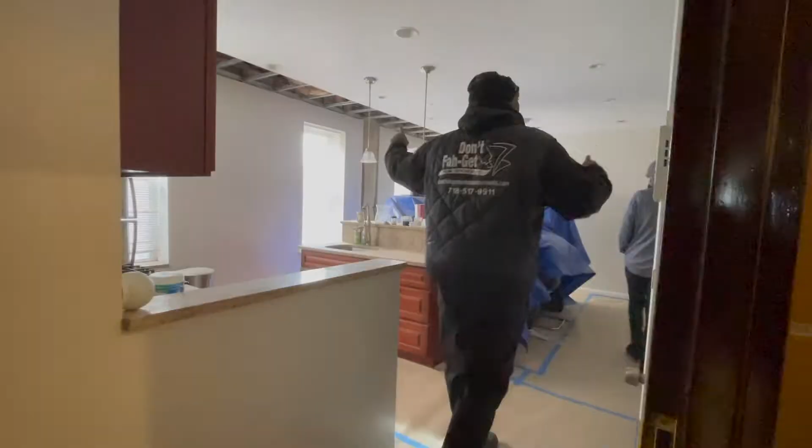Hello, my name is Darren Phillip. I'm the creator and developer of Don't Fah-Get Construction, 162 Towers, and Phillip Solution. Prior to becoming a developer, I was a professional athlete. During my days of playing professional sports, all I thought about was my next career, and that was to become a developer.

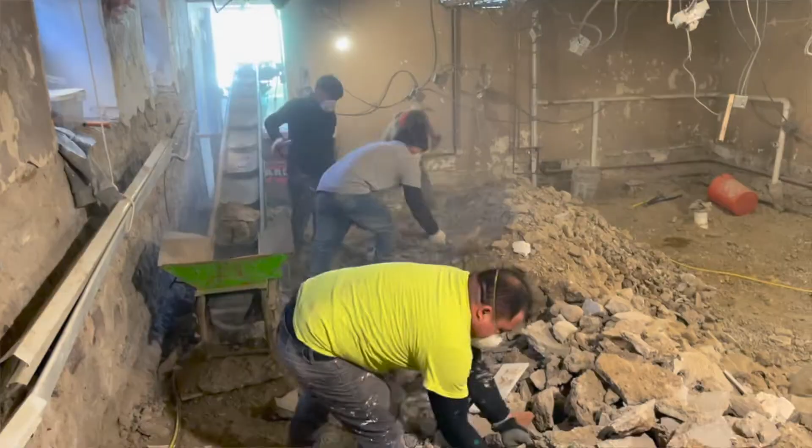So we're here at 162 East 52nd Street, also known as 162 Towers. We're doing something here that most people don't do. We're going to be changing an apartment complex from a 4-unit into an 8-unit. And you want to know how? Hard work, dedication, determination, and the know-how. This is something that everyone can do. A lot of individuals like yourself have multi-units that they'd like to get bigger. In our New York City area, you can't go east to west, you can't go left to right. But what we can do is go north and south and go up.

And this is the process we're doing here. We're doing something that hasn't been done on this block. Not a lot of people do it in this neighborhood, multiplying the amount of people that can be put in this building. 162 Towers is going to be the first of its kind. There's not a lot of projects, as I explained, that have this type of work and the way it's going to be done. This is a process that's taken years.

This is what turned me from a common local contractor into a developer, because I want to develop space. My game plan is to develop the area, and the only way to develop the area is bringing fresh and new blood.

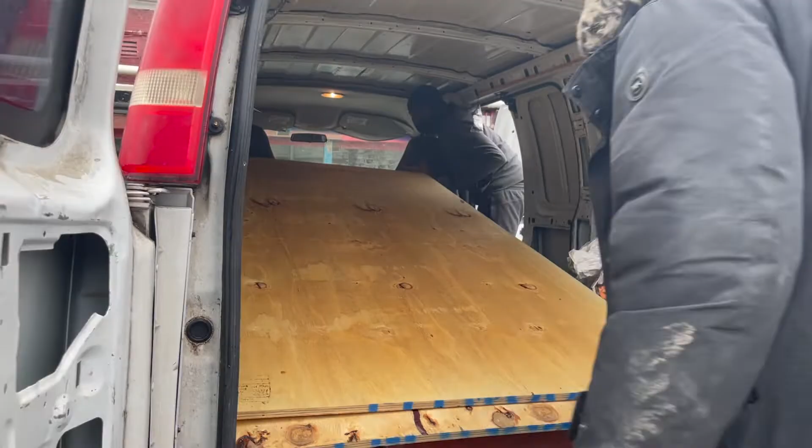Here we are coming back from the backyard where we put most of the materials, because another thing you have to do when you're doing construction is have storage places. A lot of times you want to order material, and especially in this climate, materials are very hard to get. So what we have to do is always have somewhere to store it, somewhere to put it, so we know exactly when we need something, we have it.

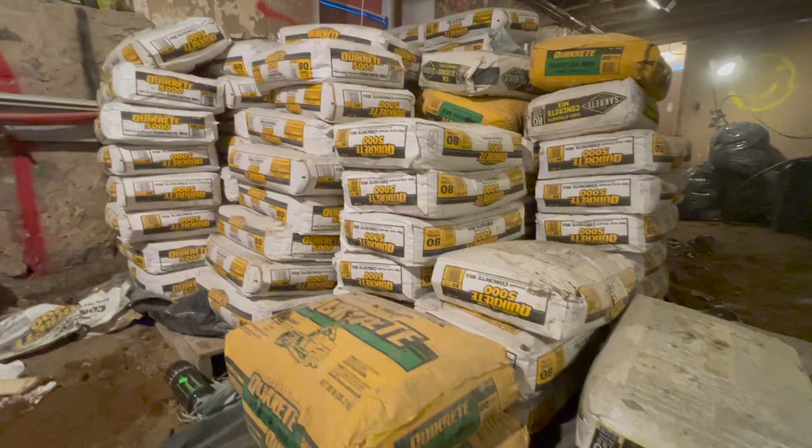It's really difficult in this day and age, but what makes it special is planning. You have to plan. I know everyone says that planning is easy, but it really isn't. It's something that has to be done every day, because plans change, things change, people change. The amount of money you have changes, the amount of money you have to spend changes. So it's something you have to have. Make sure one of the areas you have is storage, and one of the areas here where there's not a lot of lead time, because you lose a lot of money when you don't have the things you need in order to take over.

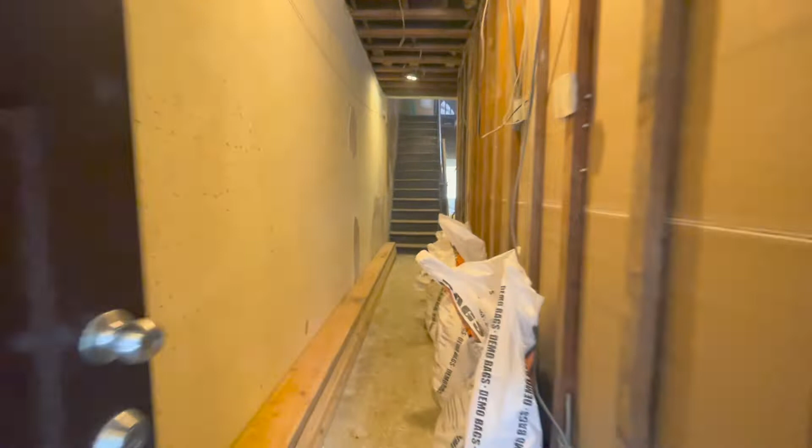Need some natural light. Let me see if I can get you some light up in here. Okay, so this is one of the first apartments that we're going to do a little bit of renovation to.

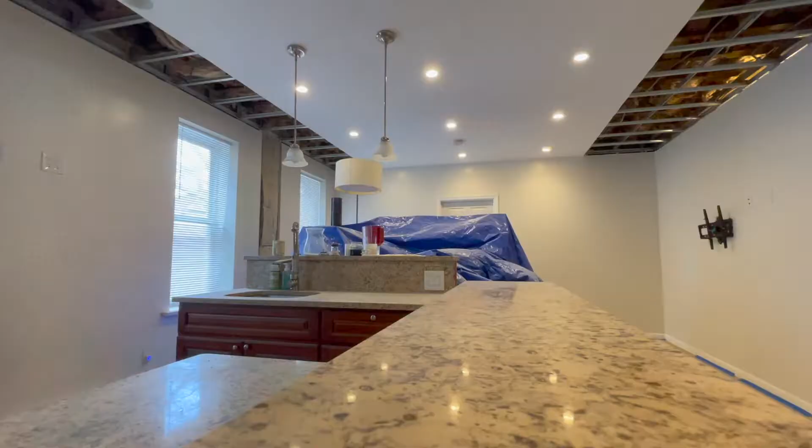What we're going to do in this apartment is basically add on to it. The apartment was recently done in 2016, which was a gut renovation, so the apartment is where it needs to be. One of the tenants that's going to be occupying this apartment is actually staying in another space, because when you build onto a building of this stature, no one can be around here in the building.

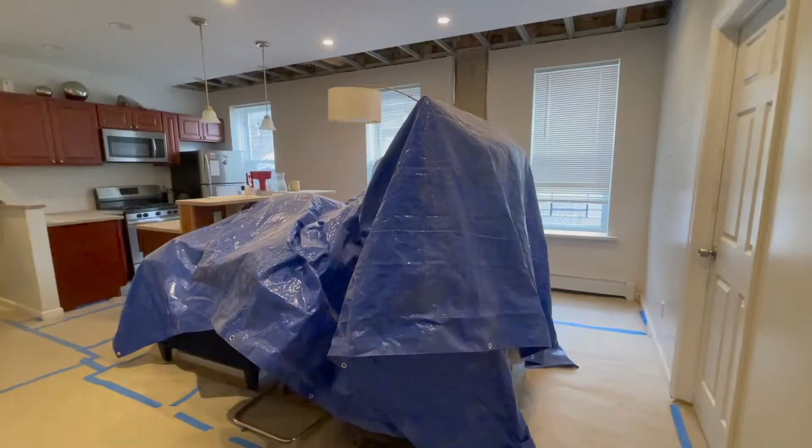No one can live here, for safety precautions, and also because of the dust and dirt. This is what happens in construction. I call construction one of the grimiest work to do, because there's a lot of dust and dirt that can affect you health-wise. So we don't have them in here, but we're taking care of their place. As you can see, one of the biggest things we've done in here is protect their things. They have things that continue to stay here, so we cover them, we protect the floor, in order for us to get this apartment to where it was.

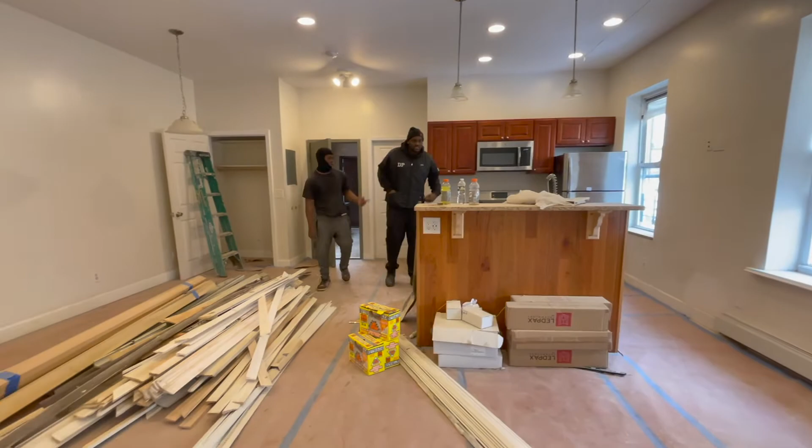This apartment is a normal 2-bedroom apartment. Well, we're changing this into what I call a super apartment. This apartment is now going to add the HVAC system, which is the cooling, heating, and air. So during the wintertime, besides their normal heating radiators, they're going to have what we call the mini split system. And what that does is give them extra heat and gives them air, the AC factor in the summertime.

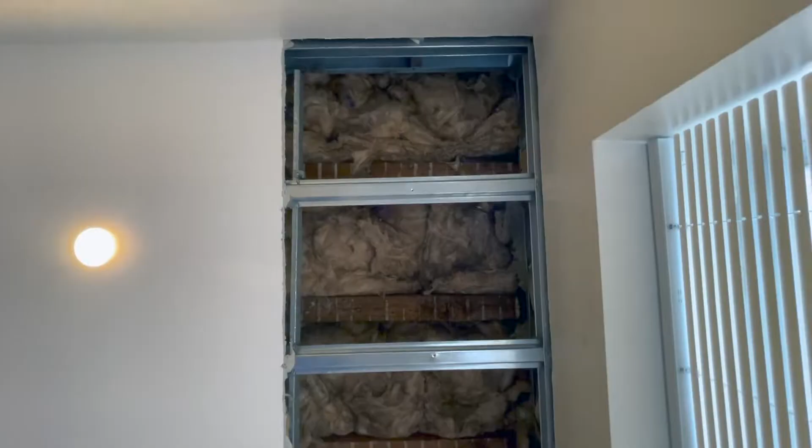So what we're doing is giving them an upgrade. We've also opened up all of these ceilings, because this building is going to be bigger, and it needs something called a sprinkler system. Every building over 4 families in New York City, New York State, needs a sprinkler system, and that's what we're doing here. So these are opened up to add the HVAC, their own heating and air, and to add the sprinkler system. With that, this apartment will be completed.

Here we're gonna do some painting, just sprucing up the place a little bit so they can feel more comfortable when they get in here. It'll be the first apartment done, and it's going to be the apartment that we call a pilot program.

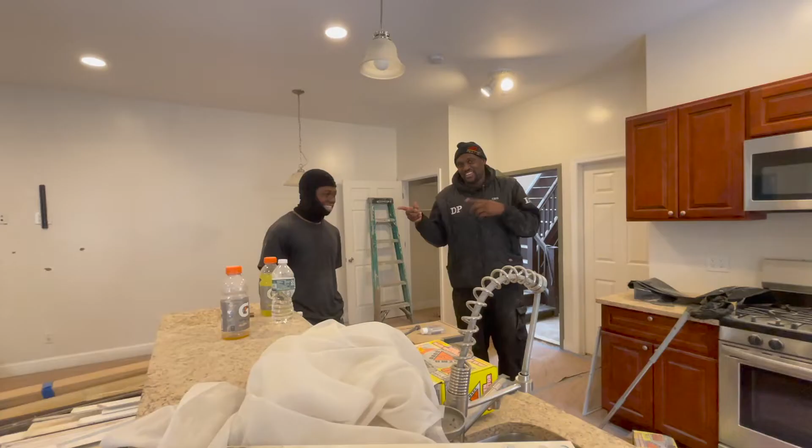Where people come in and see what can be done and how it's being done. A lot of individuals too, I'm trying to teach everyone that understands this process that if not you, then who? Because you're going to be able to do this on your own. What I'm going to show you is that this is a process that everyone can do, if you plan it right and have the right people in your corner, meaning the right individuals doing what they're supposed to do, because everyone has their own job, and it's a job for everyone. So if you put everyone in this space, you can do this. You can do this without having to be the Turners of the world, the Gilbanes of the world. These are the bigger companies. You don't have to be that way. You can, or other people that feel that this is what they want to do, this can be done.

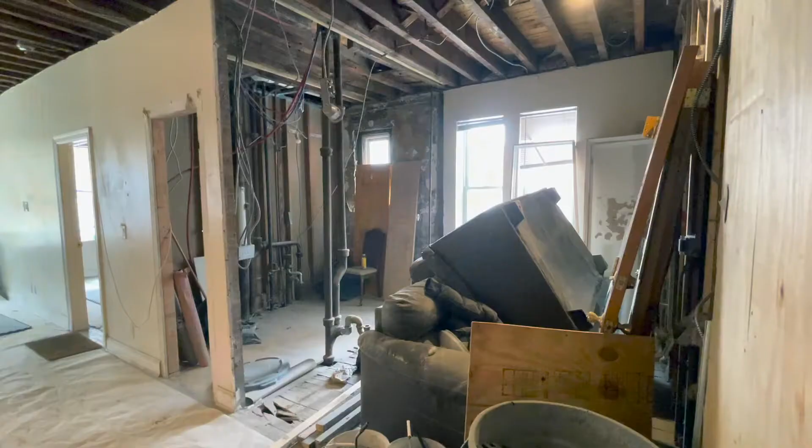Okay, so we're here in the only one bedroom in the building. This one is my pride and joy, and the reason it's my pride and joy, this one is going to be the most sophisticated. This apartment is going to be a 1-bedroom duplex. A lot of people ask me, why a 1-bedroom duplex? Why not turn it into a 2-bedroom if you have that kind of space? Because 1-bedroom duplexes are not in this area. This is not what people typically find. So this is what people are going to typically want.

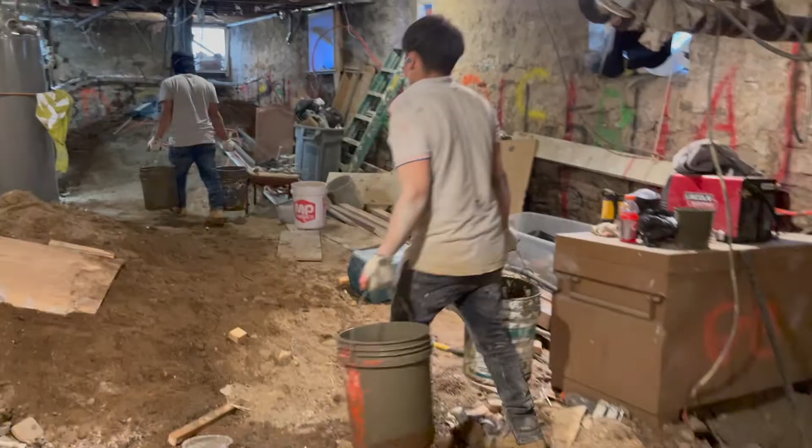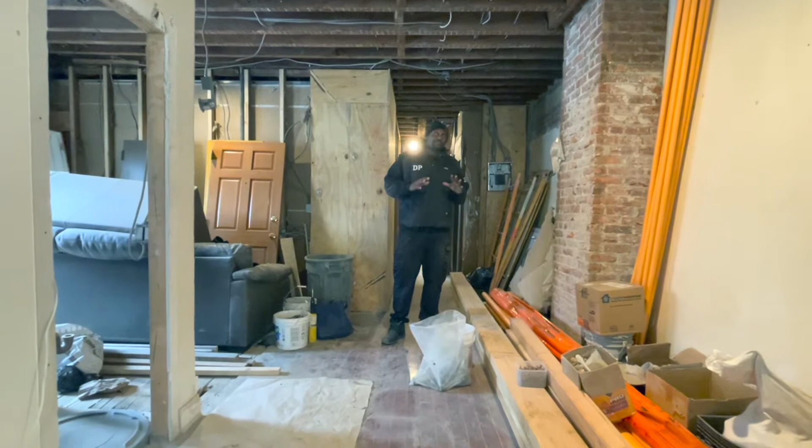So what we're going to do is connect the basement and the first floor together to become a duplex. The reason I call it my pride and joy is because it's not being done in this area. This is something that's going to be one of our claims to fame. As a developer, as a contractor, this is something that I sometimes don't know how to explain. It's something that I go to sleep smiling at, because not a lot of people do it, not a lot of people understand it, and not a lot of people care to want to do it. And that's because a little bit of it is the cost, but the most important thing is there's a lot of strategic things that need to be done.

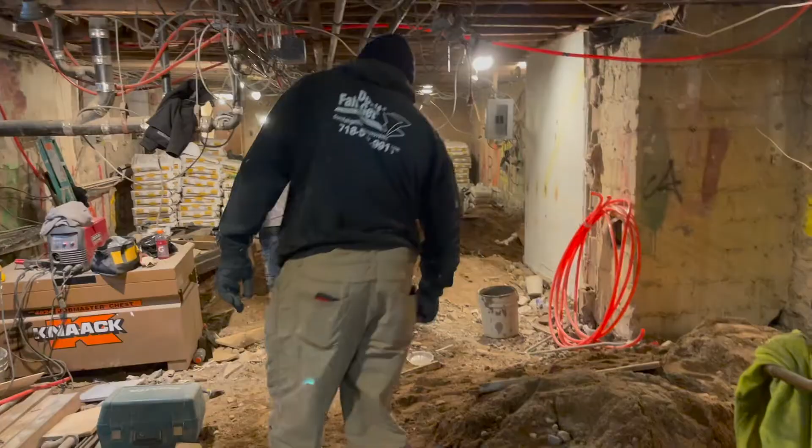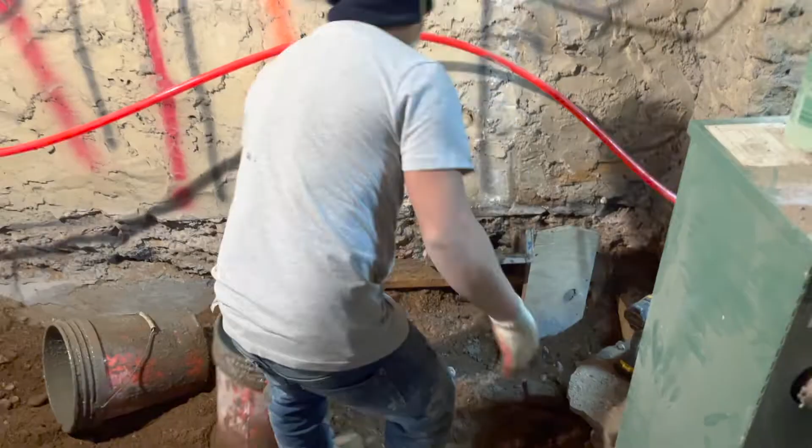So it's a structural thing. The biggest thing for our company is structure. I want to know every time I get up in the morning, every time I go to sleep at night, that my building won't fall. So the thing we're handling is a lot of the structure. Adding stairs into an apartment, we're putting footings, which is our underpinning under the building, which transfers the weight, so that now the building is going to be strong enough to put anything we want going up.

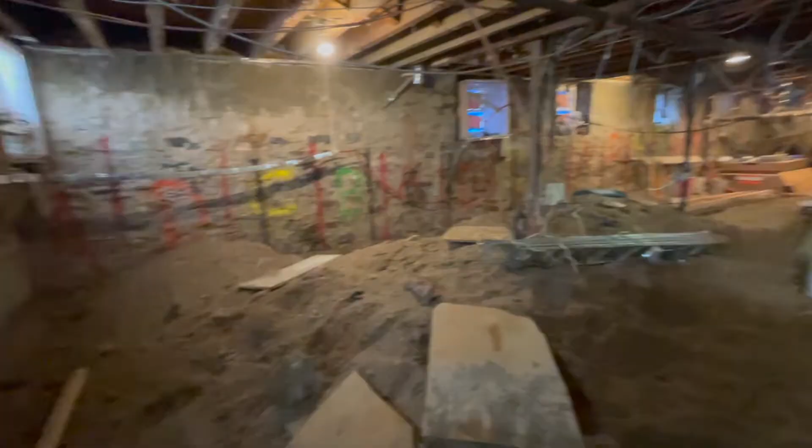In the future, the zoning could change. Right now it's an 8-unit. The zoning might change a little bit. This is an R6 zone, it might change into an R7. An R6 zone just means 6 stories, so it might go to an R7, 8, 9, and then I can continue to add onto it. So what I'm doing is taking care of the structure and the underpinning.

Going back to this 1-bedroom, this one is going to be a 1-bedroom duplex, something that hasn't been done, as I explained, something that's going to change the makeup of the area. Because once I do it and show people that it can be done and it's going to bring value to their building, they're going to want to do it. This apartment now in this area in New York City, in Brooklyn, is going to go from $3,500 to $4,000. So picture that: if you just add a little piece to your basement, that adds to what the building makes per year as an owner, something you'd be happy about. There's more gifts to buy, more things that you can use.

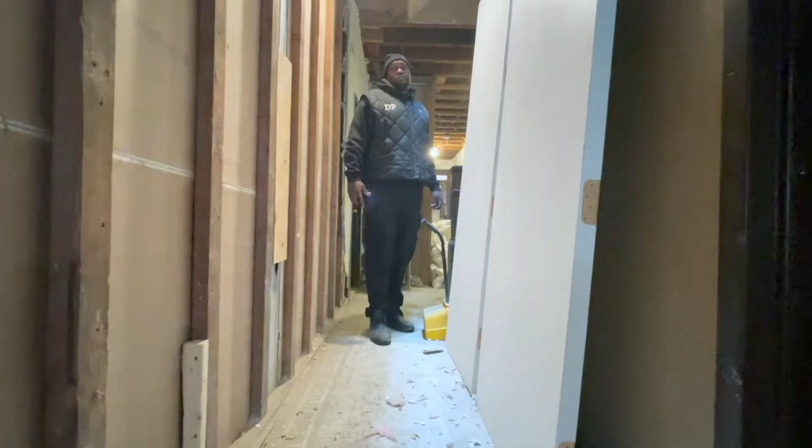So the next part we're going to show the second floor, which from the bottom is actually the 3rd floor, but it's the 2nd floor as is the walk up. I want you guys to see the process of what we're doing, so you're not scared or startled when you look at these videos and think that's impossible. Nothing's impossible, especially in construction. Everything can be done, at a price, at a time frame, and the way you want it.

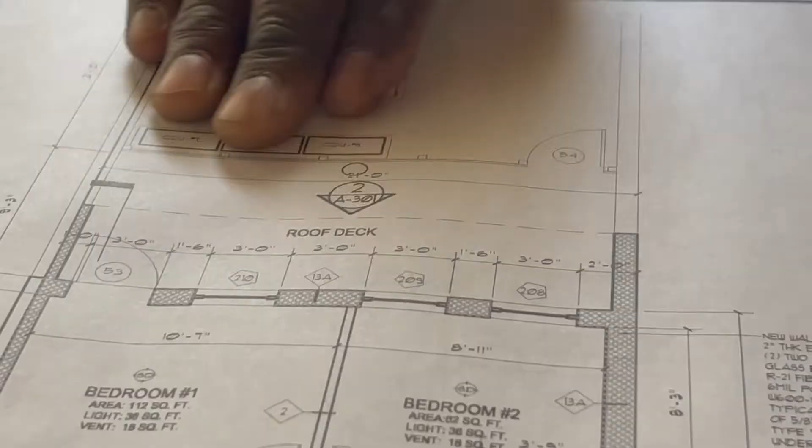It's an open canvas. So what I'm doing with this building is a canvas. I sat down with the architect and made sure he put the canvas on the table, and I took the paint and threw it against the canvas. And now a creation was born. So that's what we're doing now.

So what I'm showing you guys now is upstairs, this is the hallway. Whenever you're doing a building of this magnitude, there's a lot of different moving parts, a lot of different things that have to be done. What we try to do is always take the building down to the bones, because this canvas is easier to create. When you have something that's blank, it's easy to create, and that's what we're doing.

You're also going to see the way a lot of us are dressed here. We're dressed in a way where we're comfortable, but it's construction at the end of the day. So if you see dirt and marks, know I'm not just the person that talks, I'm the person that gets into the mix. I call it being in the mix.

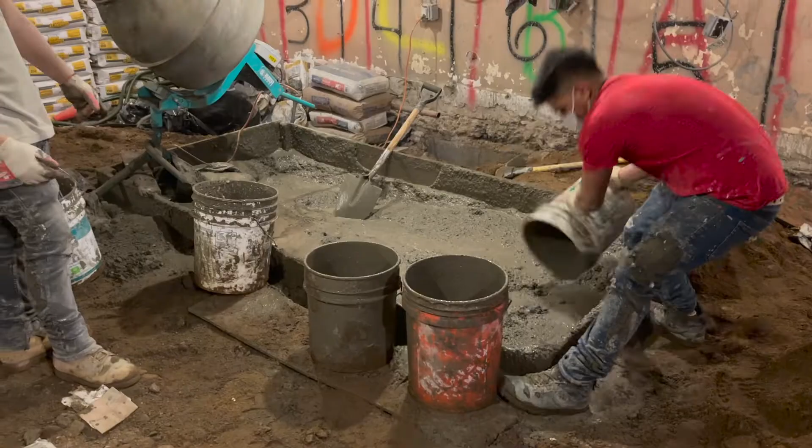Because if you understand the value of hard work and doing it yourself, you're going to respect the people that do it for you, and it's going to be easier to compensate these individuals. A lot of people do a lot of haggling, and that's not always the best thing to do, because you want your work done efficiently, and you want people to come to work every day that want to do it. You don't want them to think it's just a dollar, because then you're not going to get the maximum effort from them. Once they're comfortable and also making money, you're going to get the maximum effort.

Because in construction, in real estate, in anything to do with property, the contractor can make or break you. Can make or break how much you spend, can make or break your time frame, can make or break what you want to do. Because you could come in saying I'm going to do this, this, and that, and if the contractor's not on board, this and that turns into that, this, and this.

So what you're going to know today is that all of this can be done. You just want to see it. What we're trying to show you guys today is exactly that. Just to see it, it can be done, and don't be afraid of it. A lot of people are afraid of construction, or afraid of real estate, or afraid of tenants. Don't be afraid. If this is the business, this is the business.

You have people that have their 9 to 5, it's a setting they have to deal with every day. You go to your 9 to 5, you have to work on it, there are deadlines that have to be met. It's the same thing in real estate across the board. So don't be afraid, it's something you can do. So let's go upstairs.

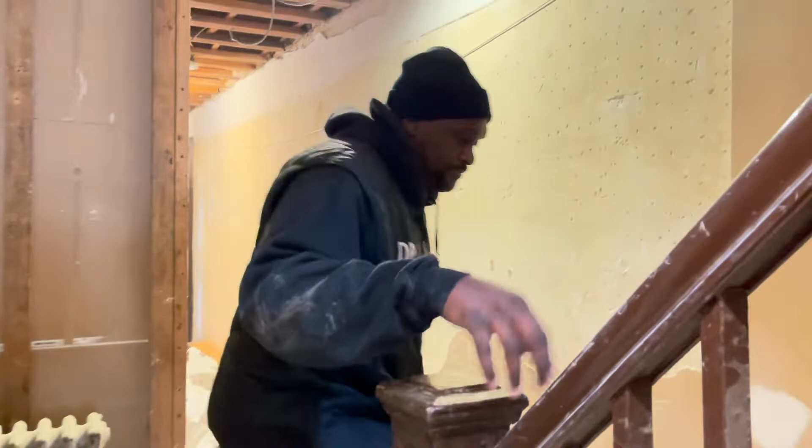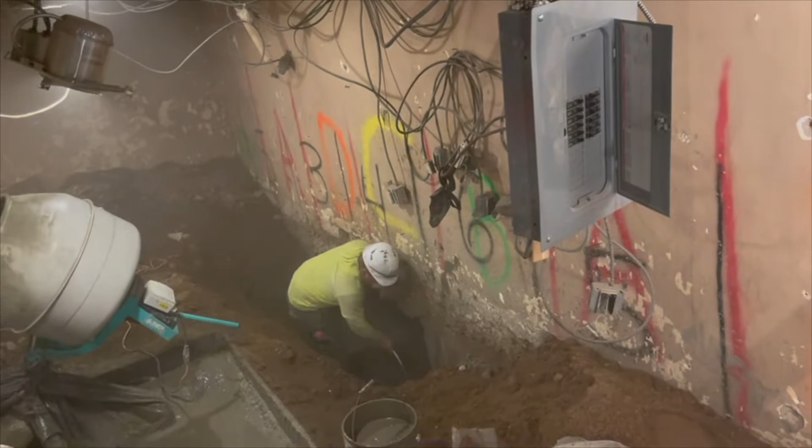So this is the top floor, the top floor of the existing building. We're going to be adding 2 more floors to it, but these are one of the apartments that were renovated earlier, in 2016. I think this one was renovated in 2018 to be exact, so it's pretty young, but there's going to be some upgrades to it. As we talked about downstairs, one of the pilot apartments, this is another one of them.

One of the things we're adding is a sprinkler system, because as you add capacity to the building, it has to be safer. If there's a fire, New York State's laws say anything over 4 families needs a sprinkler system. So that's going to help, and it also brings value to your building, as far as insurance goes too. So that's something I've got to touch on.

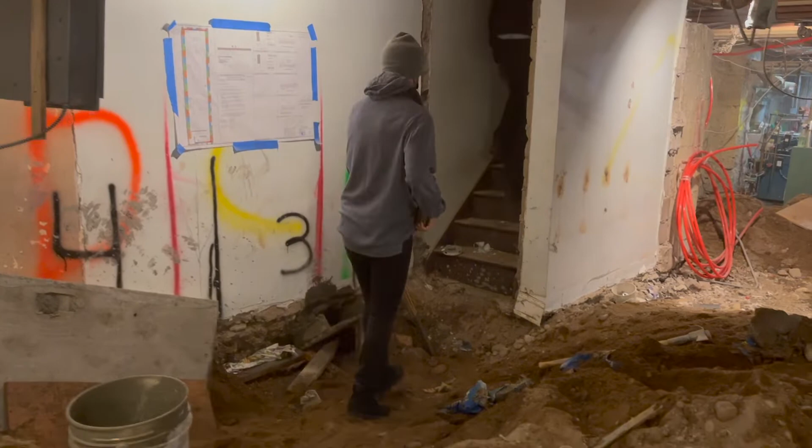A lot of times when you're doing buildings, especially when tenants aren't in there, you have to have a certain type of insurance. One insurance we have on this building is called builder's risk. We had the inspector come yesterday. They want to make sure that when you're doing construction, you actually know what you're doing and how to keep the building safe. Because they don't want the building to go down, blow up, catch fire, or end up somewhere it shouldn't be because you don't know what you're doing. Yesterday we passed our inspection for builder's risk. That's strictly an insurance policy for when you're building. It's the only policy they allow, especially in New York State. Other states can be different, but in New York State, that's what you need.

So we're doing the same thing we showed downstairs. We're putting in HVAC with mini splits in different spaces. I use mini splits over central air because I like to have my own heat or cold at the temperature I want. With central air, that's the temperature for everyone — although you can zone it, you normally don't zone each room. With the mini split, we'll have it in each room, so each individual person can be comfortable in their own space. That's what we're going to be doing in here.

Besides the painting and upgrades, we're going to upgrade this a little better so people can be comfortable, because after doing all the work and spending the money, I need all the residual to come back. I want to make sure that everything I put out, I can get back. That's why planning is very important.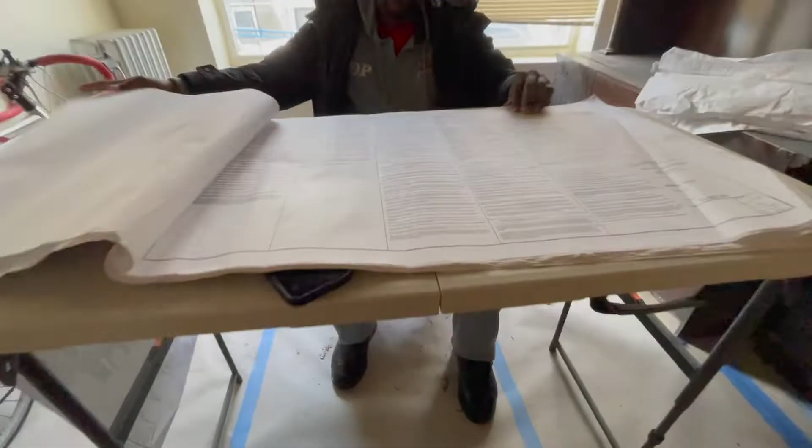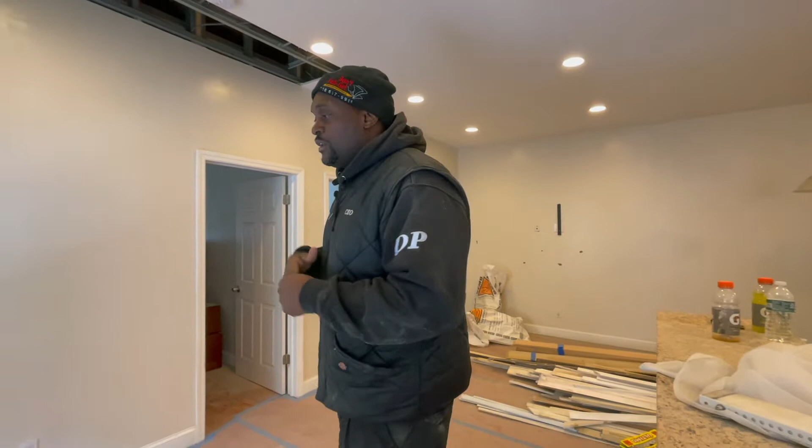What we found out is we couldn't use the same square footage as the building. We have to take off about 200 to 300 square feet in either direction, meaning the building won't be as big, as high, or as wide — but it gets its own footprint. So these 8 apartment units are going to be smaller than the first 4 that were there. That's just how zoning works. It's something you can't get away with, but it's still viable for what you want to do. So this apartment is going to be one that's used, and it's going to take some of the air space.

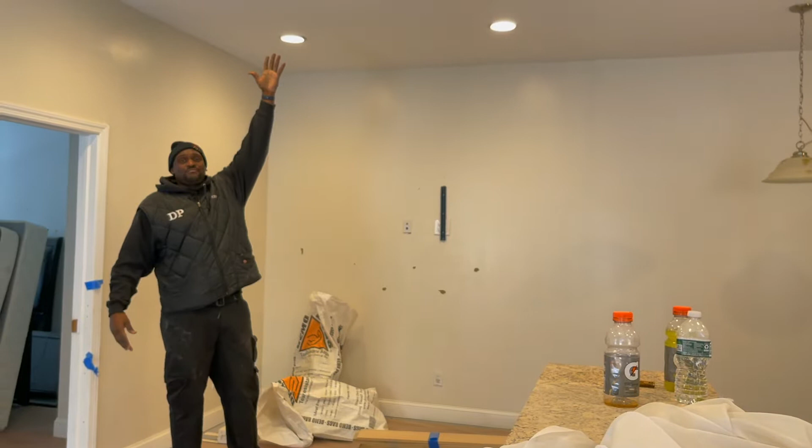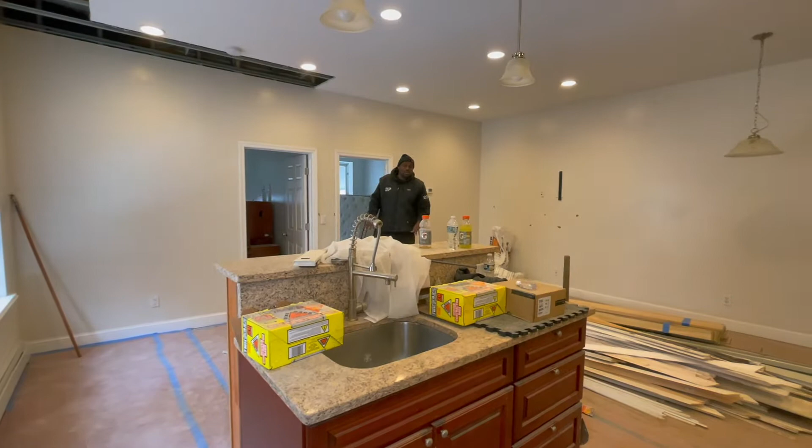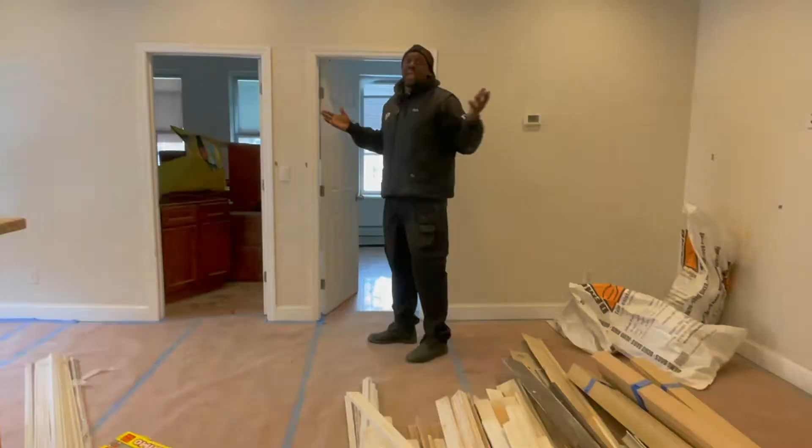So this is one of the apartments, another one of what I call pilot programs. This is an apartment I can show — it already has basically all its bones. In computers, you've got hardware and software; this apartment already has its hardware and software. It's just going to be added onto, like adding memory in computer terms. So that's what we're doing here.

Good morning, USA. My pride and joy. My pride and joy.

This building is what I call... I sit home and contemplate on what I want to call this building. I use 162 towers, obviously it's the address, but also towers because my mom used to work in the Twin Towers, and she was in the towers when they went down. She escaped, by the grace of God. She didn't lose her life. So I always said when I put together a series of apartment buildings or skyscrapers, I call this, because these are our mini skyscrapers. I'm never going to be the one in Manhattan with skyscrapers 100 floors up, so this is my mini skyscrapers. That's why I use towers.

Every property that I build will have the address and towers in its name. That's a little bit of my mom. So thanks, Mom. You're putting us in a space where people won't understand, but it's dear to our heart. You started something we call generational wealth. This is one of the reasons I'm into real estate. If you have any money, this is the easiest thing to help you grow it and maintain it, not only for you, but for your family, your kids, your nephews, your nieces, whoever you want to pass that legacy to. So Mom, thank you for helping us pass on this legacy.

The first thing you want to know is if it can be done. I always say get with an architect, hire an architect, to consult and tell you exactly what can be done in the space of this building. Once you have that, everything else is simple. Financing is easier when you have an architect that has plans or knows exactly what you're doing.

When you open a business, or go looking for funding, they ask you, do you have a business plan? The architect is your business plan when it comes to real estate. Although you still need a written business plan, the architect's plans let you bring this to any funding sources or partners, or sit down yourself and know, listen, I have the plan, this is what I'm going to do, and this is how I'm going to do it.

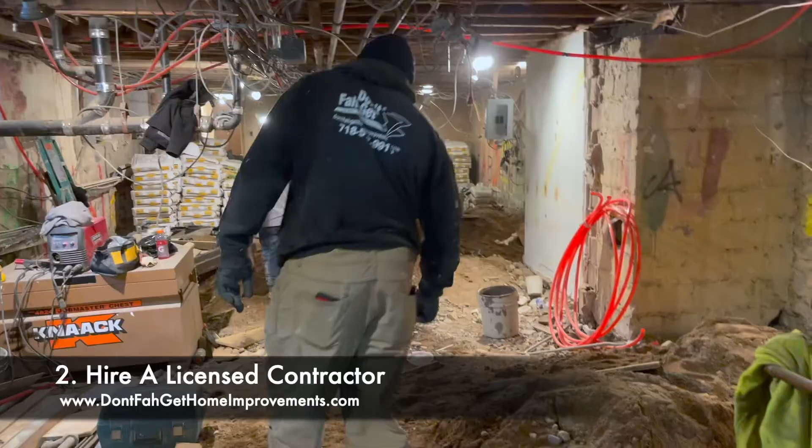Second most important thing is a contractor. A contractor you can trust, a contractor that has the credentials to do this type of work, a contractor that understands time. Time is money, money is time. That's just what it is.

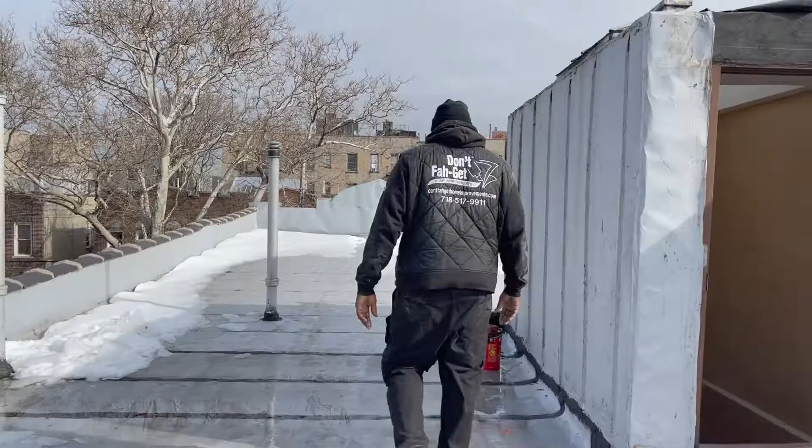This is the front of the building. This is where you're going to be able to look out and see the front, the street side of the building. The back, where we were, was in the back of the building. This is going to be the back part of the building. This is going to be the front of the street side of the building. This is what you're going to see.

The back side of the building is going to have decks. It's going to have Romeo and Juliet towers, I call it, which is where you can step over and drop down your hair and enjoy your surroundings. So this is the rooftop, which will be a rooftop deck, but 2 floors above. So basically, we're going to be like this building across with a rooftop deck. It's going to be phenomenal.

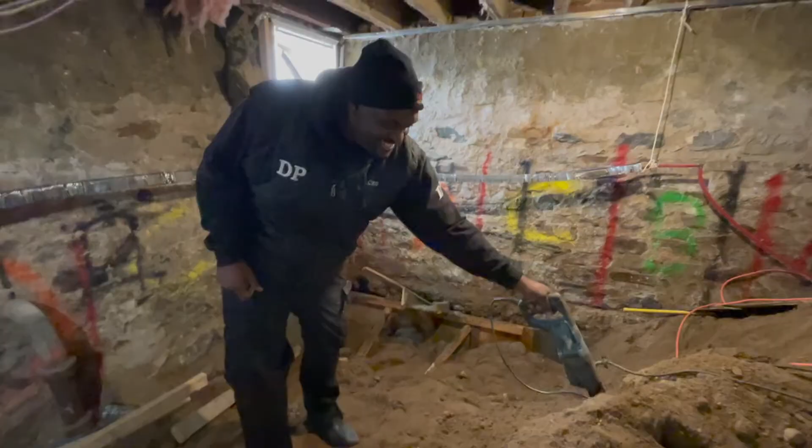So this is the most important part of the building. I know I've stated about going up, I've stated on renovating, I've stated on a lot of things, but this is the most important part of the building. This is what makes sure the building can handle the weight and handle everything that we're doing going up. No matter if it's weight, no matter if it's size, no matter if it's width, this is what happens.

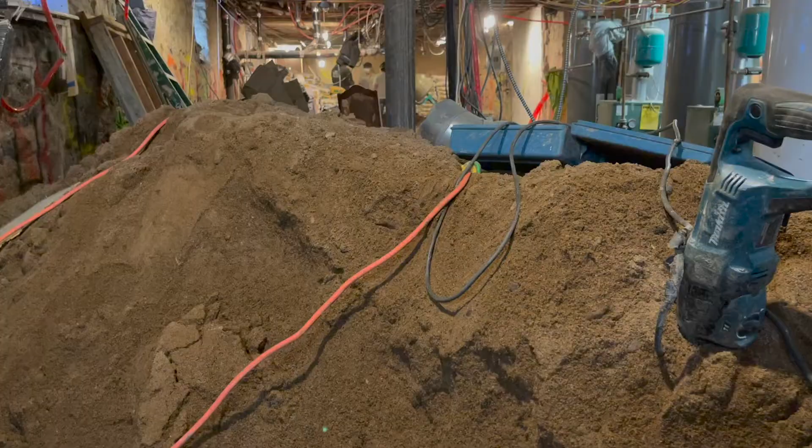So what we call here is called underpinning, footing. What we're adding is footing to the building. The easiest way I explain what footing is, is comparing it to a human being. So comparing it to the human being is real easy.

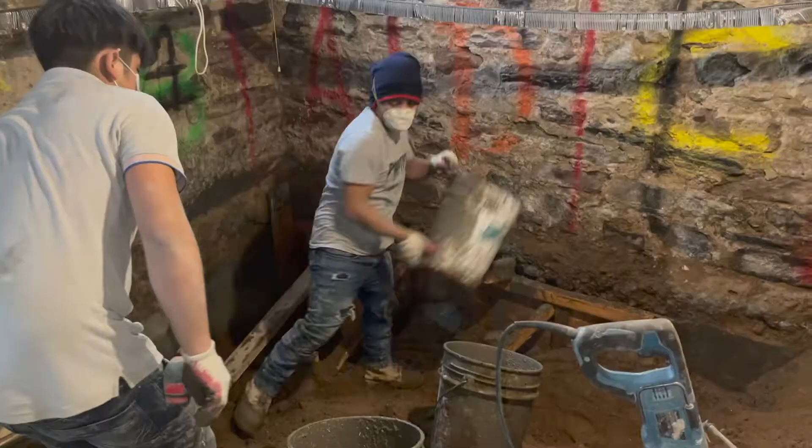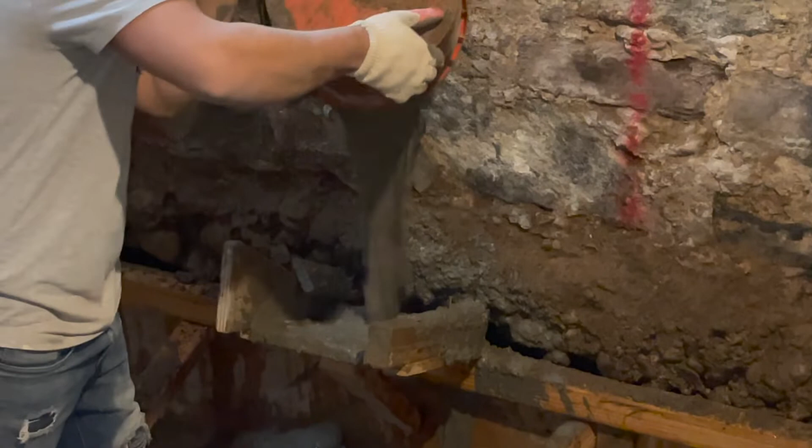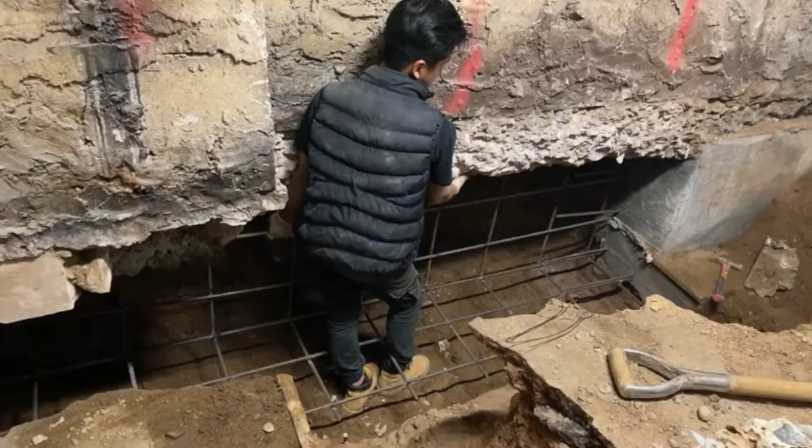When you get taller and when you grow from a baby to a toddler to a kid, to a teenager, to a young adult, to becoming a mom or dad, or what we call the head of the household, you grow. The easiest way that you know that you're growing is your foot size. Think about it when you was a kid. Your parents used to always say, yo, you're growing like weeds. Why is your foot always growing? The same rules apply when you're doing a building, when you're adding footing, when you're adding strength, when you're growing the building up. It's real easy. In Spanish, they say growing the building. They kind of turn it around.

So what we're doing is we're just doing the same thing in the building. This building was able to hold 3 floors. Now we want the building to be able to hold 6 floors. And how we do it is something that we call underpinning, something that we call footing. So just picture yourself, as you grow, your feet getting bigger. So the reason your foot gets bigger is to hold your weight and your size.

The same thing you want with a building. The same format, looking like a letter L. This is the building, this is the footing. But we bring it down a little bit, more like a jug handle. But for us as humans, we do the same thing as an L. Your foot gets bigger, you get taller, you get wider. The same thing we're going to do here.

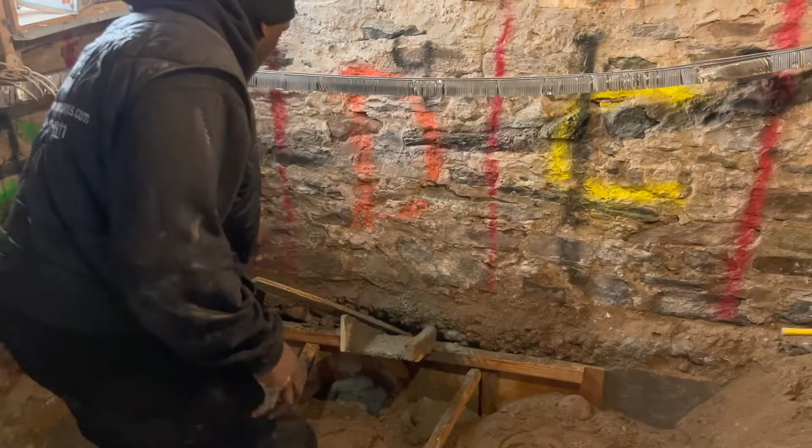So if you look at the things that we're doing here, we're adding cement to the bottom of the building. So if you look at it now, I'm going to try to show it to you a little easier. Here, this is the old footing. The top part is the old footing. This is what was there prior to. Now that the building is going to be growing up, or the building is going to be adding to the building, adding square foot, adding weight to the building, now we add something called the footing. So what we do is a cement base.

We use a normal cement base, or by code is 4,000 PSI. We use 5,500 PSI. Between 5,000 and 5,500, we use both bags. The reason we use it is just for more strength.

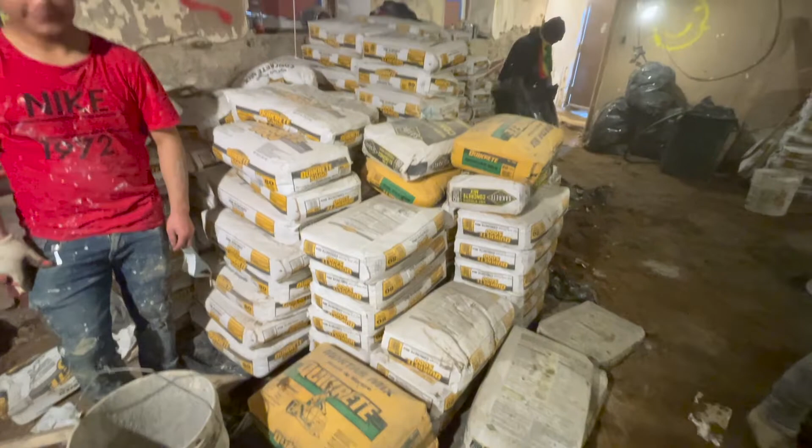What we're trying to do is make the building understand. And when I say understand, it's because the building has to understand its weight as well. When you walk in as an individual, what do you do? If you put a backpack on, you know what you could carry in your backpack. The same thing the building has to do. So what we're doing is setting its feet so that the building is strong enough to take 2 more floors, or in our case, 4 more floors. Let's say they change the zoning in 5 more years and we want to add, this is what we're doing.

The cement we get goes by numbers. Number 4,000 is the normal, just to add floors on. What we did is add more, because in case in years to come we need to add 2 more floors, we know the building can handle that.

We're giving it more strength, more ability, more fight basically. It's just like carrying a backpack from 50 pounds to 80. You go in the weight room, you lift 50 now, as you get stronger you lift 80. It's the same thing. So what I want to show is the process.

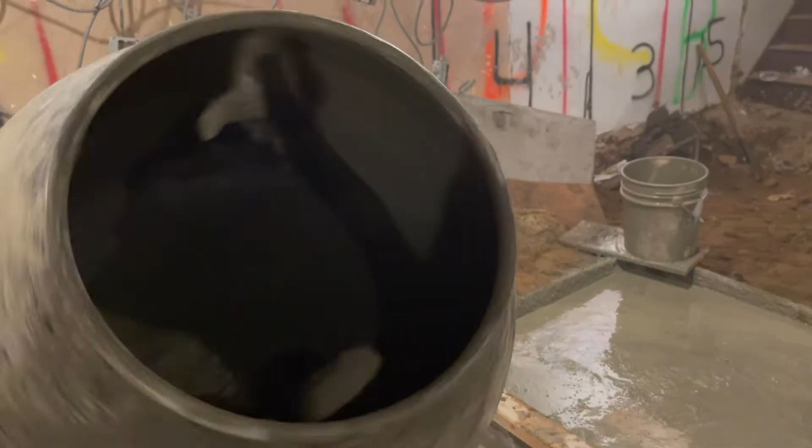This has taken us a month to do. This Friday, this will be done. So why does it take so long? Because concrete takes time to cure. Over a month span, the concrete will get to its strongest point, and that's what we need. Before we can start going up, we want this building to be at its strongest point. And that's where we are.

That's what the gentlemen are doing over here. They're pouring the concrete, they're digging the holes. As you can see, there's plenty of concrete bags here. So by Friday this will be done, and then it's on to the second part of this construction. But this is the most important.

This is the thing that shows, and the thing that makes this building get stronger, get bigger. This is the groundwork, this is ground zero when it comes to construction for us. Once this is done, we can do everything we want. And as you can see going through here, it's all been done, and done the right way.

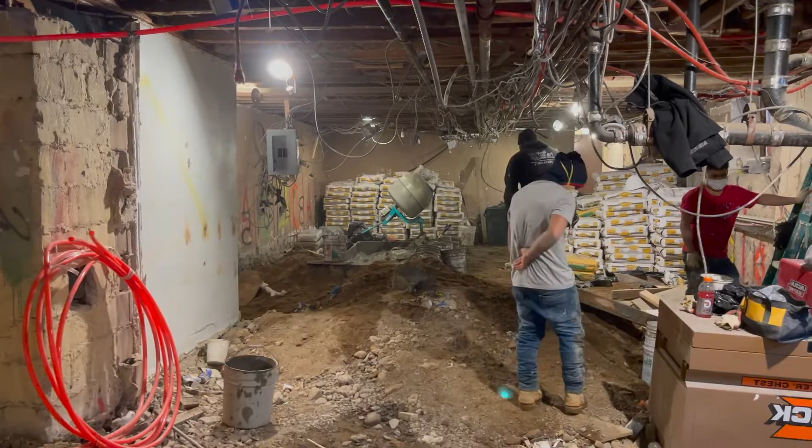We have individuals that know what they're doing. Besides me being the general contractor that tells everyone what we're doing, you have to have the right subs, the right individuals that know what they're doing and how they want to do it. And that's what we have. So I'm honored, I'm happy, and I've put myself in the right position because of these guys, and that's what you guys have to do the same.

During our time today, what I showed you guys is basically the plans for what we're going to be doing on this building and how we're going to do it, and some of the trials and tribulations, meaning the goods and the bads, what's difficult and what's not.

Now we're here at the end result. What I want you guys to know today is just going to recap a little bit of the things we talked about, and also give you what I call the skinny on getting up to this part. This is going to take about 10 minutes, so hold tight. I know you've been with us all day, you've learned a lot, you understand a lot, I'm sure you've got hundreds of questions.

We're going to have our Q&As as well, that's for another day, or further down in what we call our documentary, or our show and tell. So we'll show you that. But what I want you to learn in this little 10 minutes is basically some of the recap of it, and basically what brought me to doing it.

On the recap end of it, what we showed you today is that this 4 family is going to be an 8 family. We're going to turn this from a 4 unit to an 8 unit. We're going to have 7 2-bedrooms and 1 1-bedroom duplex with a rooftop deck.